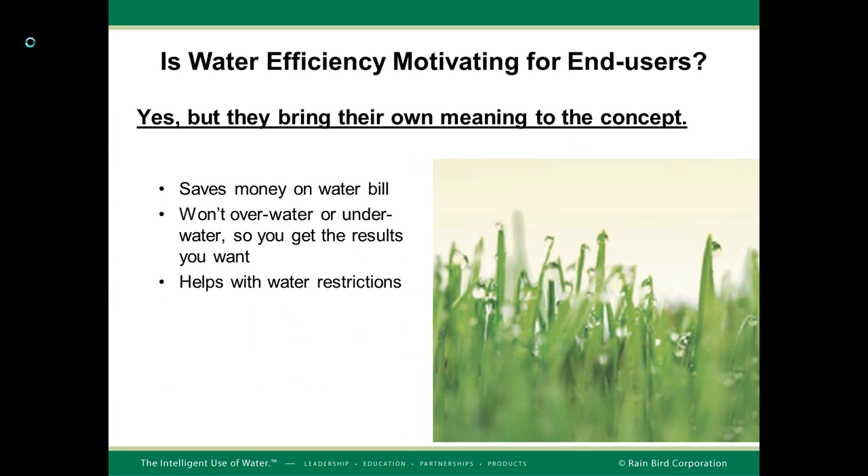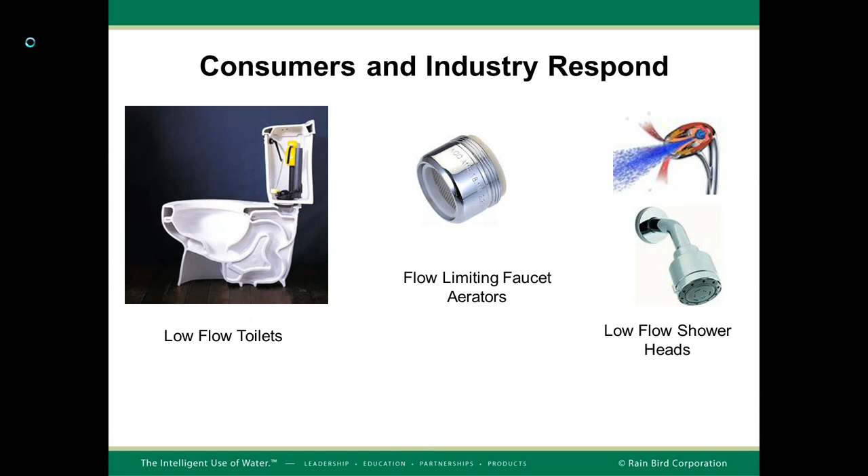We are actually starting to see some water efficient products throughout the various markets, from low flow shower heads and low flow toilets and even low flow faucets. But Rain Bird has always thought that it's our industry, the irrigation industry, that should take the lead in managing this precious resource and promote water conservation through more efficient irrigation management.

Over the course of Rain Bird's history, we have developed numerous types of water-saving products, from water-saving nozzles to sprays and rotors with pressure-regulating stems built in, to even smart control technology. All of these deliver great results, superior results, and they do it actually with providing less water.

So to kind of jump right into the product categories, let's start off talking about a couple of spray nozzles and rotary nozzles.

The first slide you see here is a HEVAN. HEVAN stands for High Efficiency Variable Arc Nozzle, and it's actually the first high efficiency variable arc nozzle on the market.

I know there's a lot of van nozzles, and Rain Bird has a regular van nozzle as well, but they tend to not be overly water efficient. If you look at some features with a HEVAN, like flow control technology, it actually gives you something a lot of spray nozzles do not give you: superior close-in watering around that head. And it's also providing very uniform coverage across the entire spray pattern.

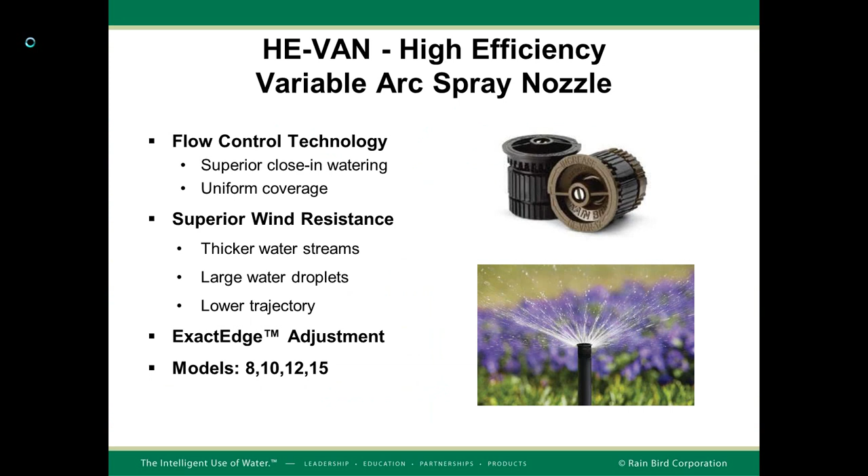If we look at the picture here, on the left-hand side is a picture of a HEVAN. On the right is a competitive van nozzle. Two things really stick out in terms of features with this nozzle. The first is the flow control technology we talked about, where you're seeing superior close-in watering around the head versus a regular van nozzle.

Versus a regular van nozzle where you're getting virtually no coverage near the head. The other is the uniform pattern. You see a very uniform pattern in the left-hand picture all throughout the radius. You really don't see water starting to hit the rest of the pattern until you get way out from the head with the regular van nozzle.

Another thing that's really important when talking about water efficiency and spray nozzles is being resistant to wind. Wind is a huge factor, and it doesn't have to be real windy conditions—2 to 3 mile per hour wind can actually impact a nozzle. So if you look at our water streams, they're very thick.

The water droplets are very big, and the trajectory is fairly low. As you look at this picture, you can see the trajectory pretty much levels out, whereas the van on the right almost continues to rise, and that puts that water pattern in danger of being really impacted by windy conditions.

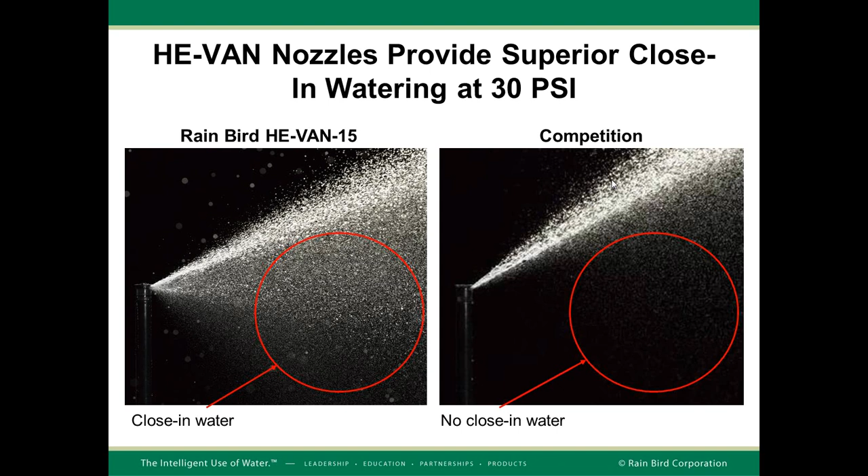When I talk to contractors a lot, I think one of the biggest complaints I hear about a van is arc drift. What I mean by arc drift is that the pattern tends to drift into areas that aren't meant to be watered over time. HEVAN actually has a really unique feature called exact edge technology that kind of eliminates this whole problem.

If you look in the top picture, you can see how you set the arc. You simply grab the collar like most vans, but unlike most vans, when you're twisting to set the arc, you're feeling a click. What this click does is actually lock that arc into place, so it eliminates that overspray.

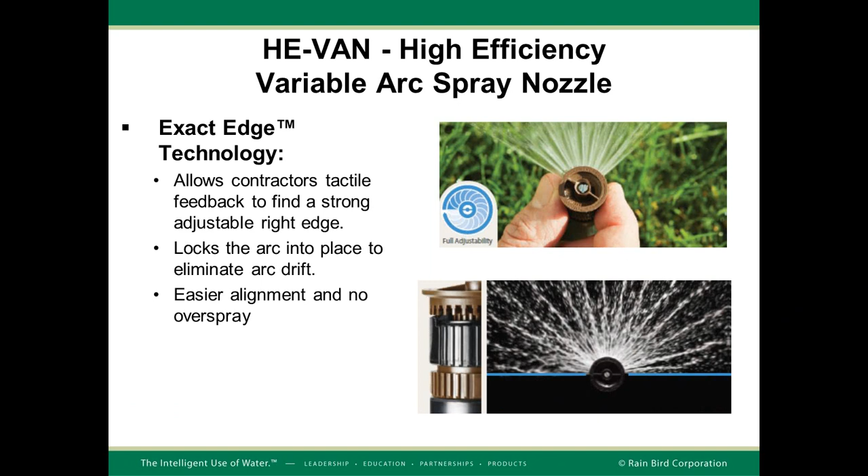If you look in the bottom picture, you see a blue line that goes across the bottom of that picture. Just imagine that dark area being the sidewalk—you're not seeing any overspray into that sidewalk area with a HEVAN. So this would be one example of many we'll talk about today, and others we won't get to, where Rain Bird has taken a very popular item like a van nozzle and made it even easier to use and more efficient.

Another nozzle I want to get into is the RVAN, and it's an adjustable rotary nozzle. What I mean by adjustable rotary nozzle is the spray pattern and the distance itself can all be adjusted by hand, so you need no tools to make these adjustments. It's different from the HEVAN because it offers rotating stream technology, delivering water very uniformly at a low precip rate.

This helps with potential issues of runoff or erosion. But like the HEVAN, it has those large water droplets, thick water streams, and low trajectory. That's why at Rain Bird, when we talk about being able to offer shorter run times with our RVANs than our competition, it's because the water is actually getting to its intended location without wind impacting its effectiveness, potentially having to increase your run times just to make sure you're applying enough water.

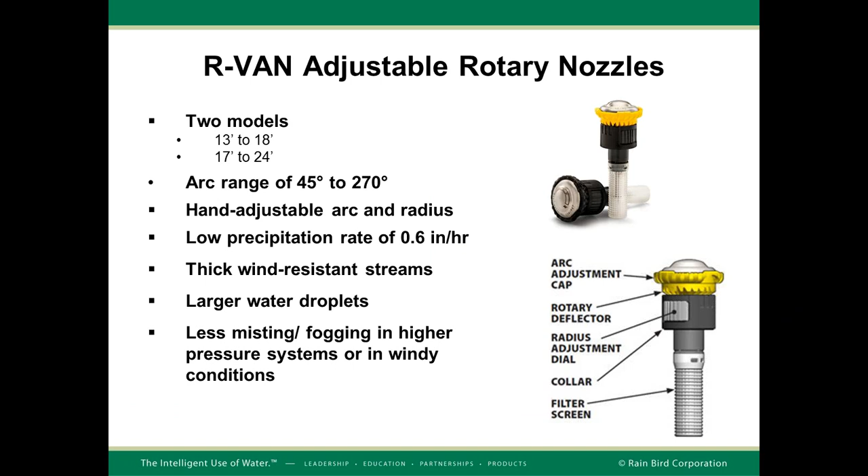If we were to look at an RVan and just retrofit a standard spray nozzle with an RVan, you can really reduce flow by up to 60%. And the overall water efficiency actually goes up by 30% when you replace just a regular spray nozzle.

Now, I kind of glossed over the fact that this is a fully adjustable, hand-adjustable product, and it's actually very important. No tools are required whatsoever to make adjustments. If you look in the top picture under arc pattern, you see a picture of a hand at the top of the RVan. Whenever the RVan pops up under pressure, you simply press down on the top and twist.

You can set the arc from 45 to 270 degrees. If you want to adjust the radius, there's a collar, just like with the HEVan, where you can grab the collar and either increase or decrease the radius.

Now, one feature that's not actually shown in this picture that I think is pretty neat is looking at the top picture again, the way you set the arc. If you need to flush out this head, you can actually pull up instead of twisting. If you pull up, it actually flushes out the head.

And the RVan is available in a 13 to 18 foot throw, as well as a 17 to 24 foot model.

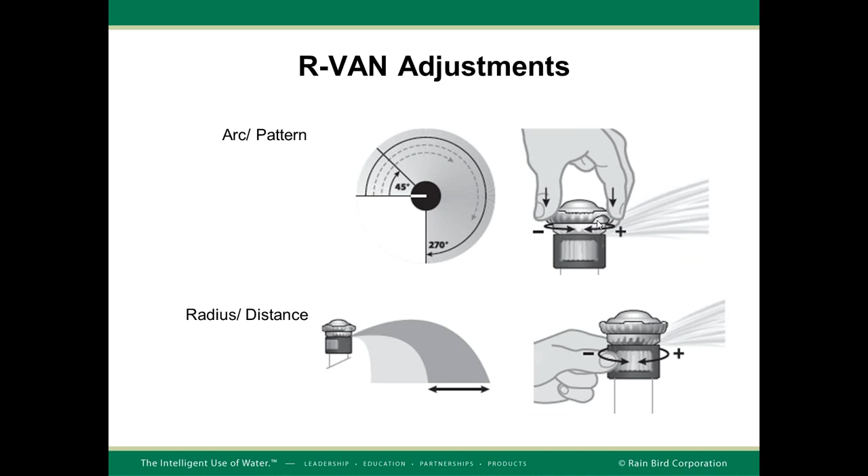Now let's get into some spray body discussions here for a moment. I think everyone has probably heard of Rain Bird's 1800 series spray bodies. For over 30 years, this spray body has been pretty much the standard in the industry, and it's been the standard because of its durability and its reliability, and its performance is pretty much unmatched.

So we started looking at other applications, other potential uses for a spray body, such as dirty water applications. And we wanted to take this spray body to another level, and we developed the RD 1800.

That growing demand on the water supply that we were just discussing a little bit earlier has really increased our overall reliance on looking at alternative water sources. As a result, water used for irrigation today is a lot harsher than it's ever been before. So when we started looking at the RD 1800, we wanted to develop those parts to be resistant to corrosion when using treated water that contains chlorine or potentially harsh chemicals.

And it's got a very innovative design that handles some of the thickest grit and some of the most dramatic pressure variations without any problem. It's got some really cool features like a triple blade wiper seal that prevents stick-ups, and something called flow shield technology that helps identify problems faster.

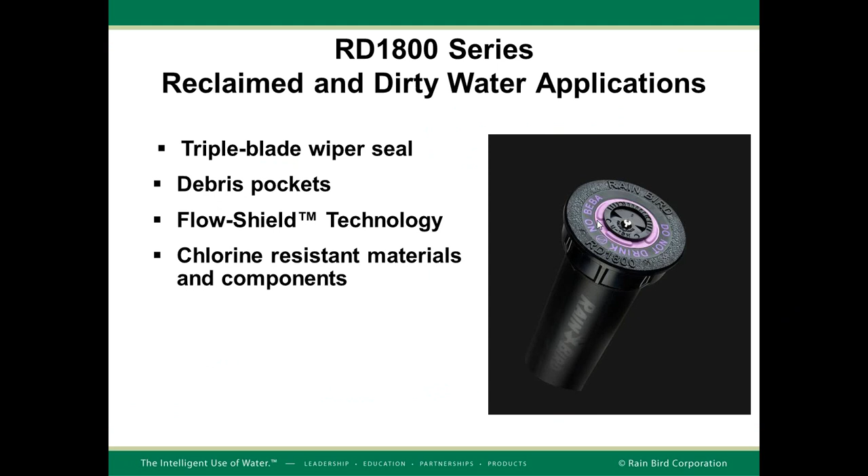So let's hit on a couple of these features real quick. In this picture, you see a wiper seal. If we step back a second, Rain Bird changed the whole irrigation technology when we developed the co-molded wiper seal nearly 3 decades ago for the 1800 series spray body. We really took it to another level with the RD 1800 by adding an additional seal, a third blade. If you look at the picture, you see a picture of the top seal.

Now, the function of that top seal is to flush during pop-up and wipe the stem clean during retraction. Then look at the bottom seal, the primary seal. That primary seal actually combines with the stem surface to eliminate flow-by.

But what if a rock or debris, or something inside of that body, over time eats away at that primary seal? It damages that primary seal. And when we're talking about dirty water applications, there's a high probability of that happening. So if that primary seal gets damaged, what happens? You have excessive flow-by, a lot of water around the stem that basically degrades the entire system.

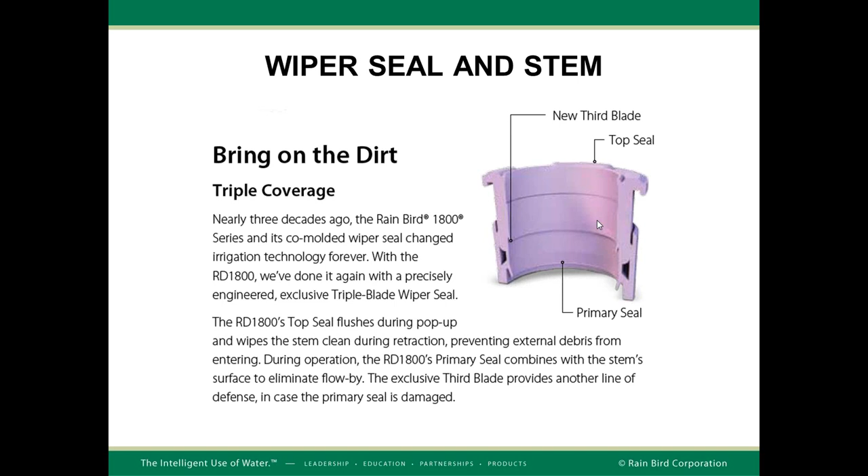So what we did, we added a third blade. It's an exclusive third blade, and this basically provides an added line of defense in case that primary seal gets damaged. So it's almost guaranteeing you that you're not going to have flow-by.

A very unique feature of this spray body is debris pockets. The debris pockets are located at the base of the spray body, and their function is to basically collect debris and prevent this debris from recirculating back out through the body.

Sometimes during system startup, maybe a system was not flushed out properly, or maybe there's just some excess debris in the lines. What these debris pockets do is simply trap this. And like I said, it keeps it from recirculating in the body, and thus it prevents wear and tear on the body itself.

Now let's talk about pressure regulation for a moment, because it's a key factor in using water wisely. Why is regulating pressure so important with the system? For me, there are a few reasons that stand out. Rain Bird, and all manufacturers for that matter, recommend an operating pressure for all their downstream components, so sometimes it's necessary to reduce that supply line pressure to fall within these guidelines.

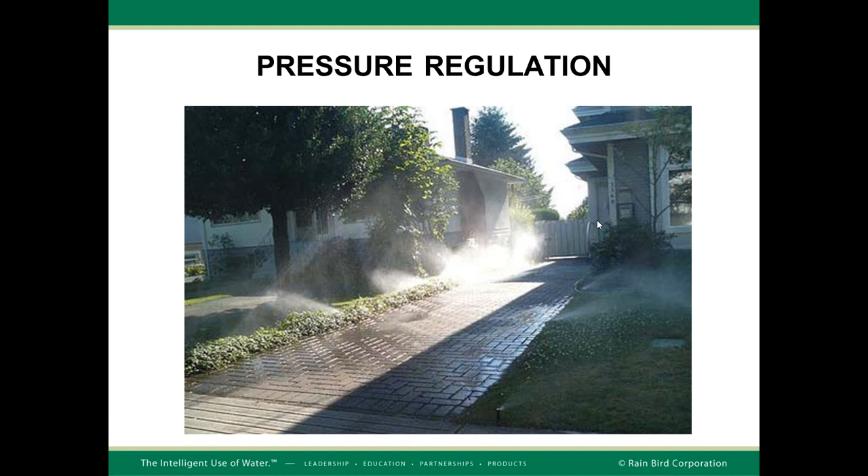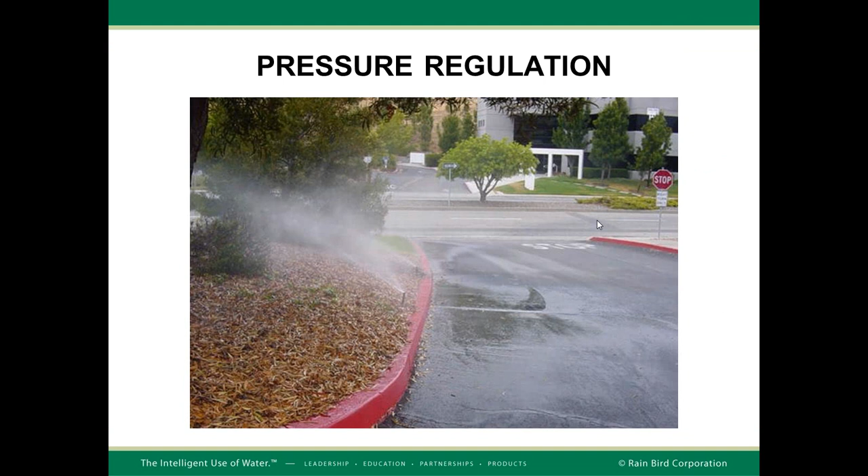Taking a look at the next couple of slides, we see a lot of overspray, a lot of water in areas where it's not intended to go. I realize there are many factors that go into overspray, but high pressure situations are a huge contributor to this. Like the picture we're looking at right now, you're seeing a lot of misting and fogging. The odds of that pattern getting to where it was intended to go are probably pretty slim.

You're either going to have to increase the run times to hopefully put down more water, or you're going to potentially just end up with brown spots and ultimately an unhappy end user. High water pressure is actually pretty common, but Rain Bird has found a fairly simple solution to solve this.

We've found that by regulating high or even fluctuating pressure at the head via pressure regulating stems, we can actually save about 1 gallon per minute for spray and rotor. Pressure regulation is now available in our rotors, specifically in our 5000 series rotor line.

Since water rates tend to continue to climb, customers using PRS rotors can enjoy considerable cost savings. Even just looking at a typical residential site, using either a 5000 series PRS rotor or an 1800 series PRS spray, they can save approximately 100,000 gallons of water per year. To put that into context, that's enough water to fill a swimming pool 5 times over.

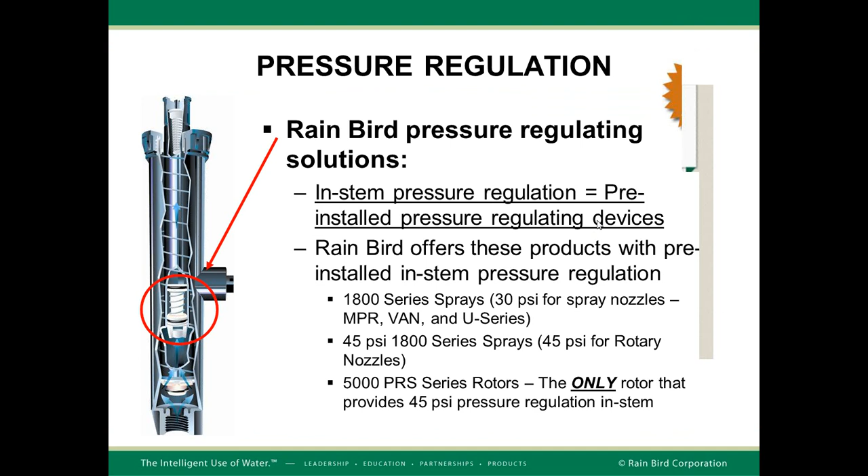Last year, Rain Bird developed a marketing campaign that ran throughout the entire United States, called Project PRS. Project PRS was intended to increase awareness of water savings when using PRS sprays or rotors. We even created a website containing material to educate the viewer on PRS savings. In addition, contractors could go to this site and submit projects where they've done installations during this campaign period using PRS heads, whether sprays or rotors, and we calculated their savings for them.

During the course of this campaign, with just the projects that were submitted, we calculated we saved over 215 million gallons of water during this time frame. So this is just another example of Rain Bird's commitment to the intelligent use of water.

In my opinion, one of the biggest offenders to using water wisely can be a controller. Not always, but it can be. Just basically knowing when to apply water, knowing how to set a run time or start time, or even just knowing that you should be using water-saving devices like rain sensors or soil moisture sensors. So at Rain Bird, we feel if we can keep the controller programming as simple and straightforward as possible, as well as offering a very logical path for progressing through the different types of controllers for various applications, then this will really lead to the ultimate goal of using water more wisely.

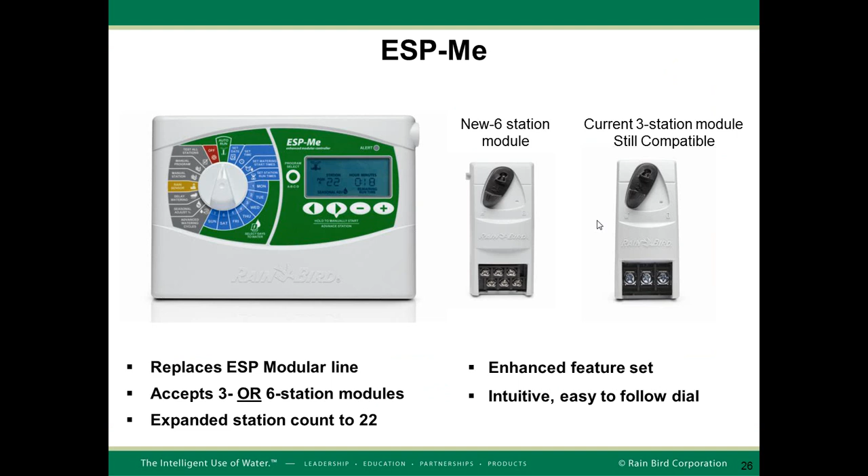Rain Bird.com, which has corresponding videos for each one of the setup features. So if you have an irrigation installer, or maybe it's the end user that just needs to refer back to something, there's always a source they can go to that walks them through the process.

One of the things that we see sometimes is that a lot of controllers are rarely adjusted. A system goes in, and a lot of times it's set for that peak irrigation. Unless it's under some sort of maintenance contract, it's rare that the controller gets adjusted. And if it's not getting adjusted and it stays at that peak setting all year long, it's applying way too much water, 2 to 3 times too much.

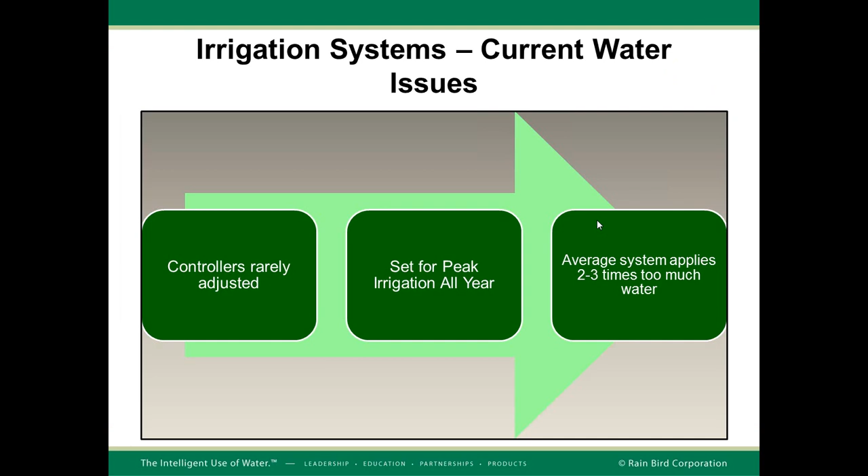So Rain Bird decided to develop a very easy-to-use smart controller. It kind of eliminates some of the problems with not adjusting the controller, or some of the past, poor scheduling issues that we sometimes see.

I think everybody knows Rain Bird has vast experience developing really large-scale central control systems for golf courses, or for commercial applications, utilizing products like Maxicom or Site Control. But we've taken all these years of experience, all this knowledge, and we've scaled it down. We've shrunk it down to a very easy to use smart controller that can be used for a variety of applications.

Now it's basically playing off the ESP-ME. It's an upgrade to the ESP-ME. And like the ME, it expands to 22 stations, where before we were limited to 13, and it's putting us in a much better position, not only on the residential level, but to service a lot of different commercial applications now with a smart controller.

And it doesn't program like a typical controller. It actually takes in a few factors before it decides whether it's going to water or not. One is it has a weather station, and it measures both the temperature and the rainfall at the site. And it's not just measuring rain, but it's also measuring the intensity of the rainfall via a tipping rain bucket.

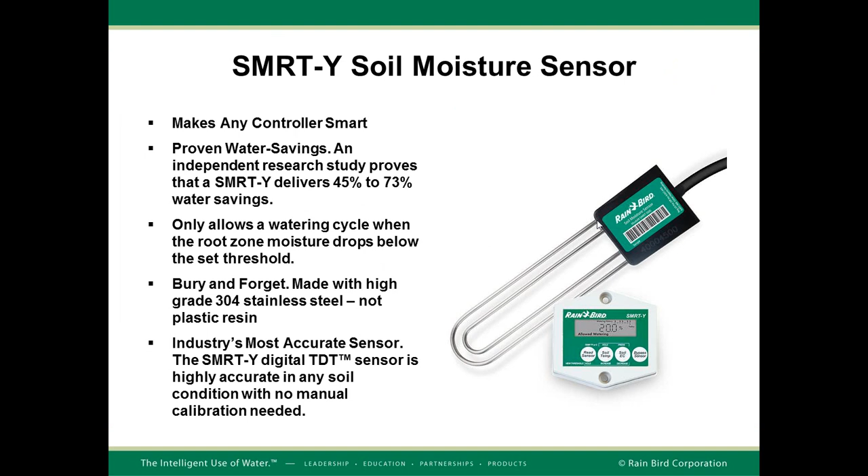And it provides the last 7 irrigation cycles on the display. So a device like the soil moisture sensor really helps eliminate a lot of the needless watering we see, letting the soil basically say when watering is appropriate. It really optimizes the amount of moisture at the root zone. From an ROI perspective, just looking at cost, it conserves enough water in many applications to pay for itself in less than a year.

When you talk about water-efficient products, one of the most efficient irrigation methods is drip irrigation. Drip delivers low volumes of water directly to the plant root, without dealing with a lot of the factors we've talked about before. You don't see water loss to wind, and you don't see a lot of runoff from overwatering, evaporation, or overspray.

Rain Bird is completely committed to this product category. We offer over 150 different irrigation products, the broadest in the industry. But for today's presentation, I'm just going to touch on two products: XFS and XFCV.

XFS is a subsurface drip line. You can actually bury this drip line. It has a copper chip at each emitter, and this copper chip helps prevent root intrusion without requiring the EPA-approved handling procedures that some competitors require because they use a chemical in the line or a treated filter to help prevent root intrusion. That's not needed with the copper shield technology.

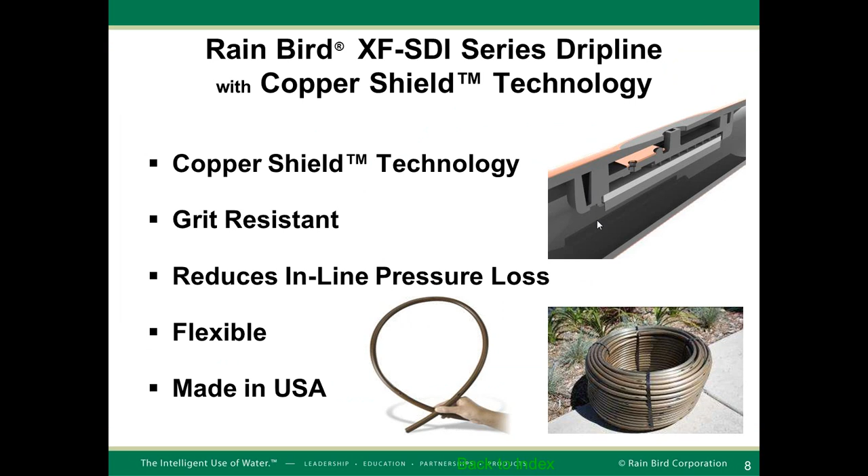With this drip line, you get dual-layered tubing—basically copper over black—which gives you strong resistance to chemical and algae damage, and of course UV damage. Even the emitter design is unique, with an extra wide flow path combined with a self-flushing action. It's also a very low profile design, which helps reduce inline pressure loss and allows for longer lateral runs, simplifying the design process and reducing installation time. The tubing material is the most flexible in the industry, making this subsurface product very easy to design and install.

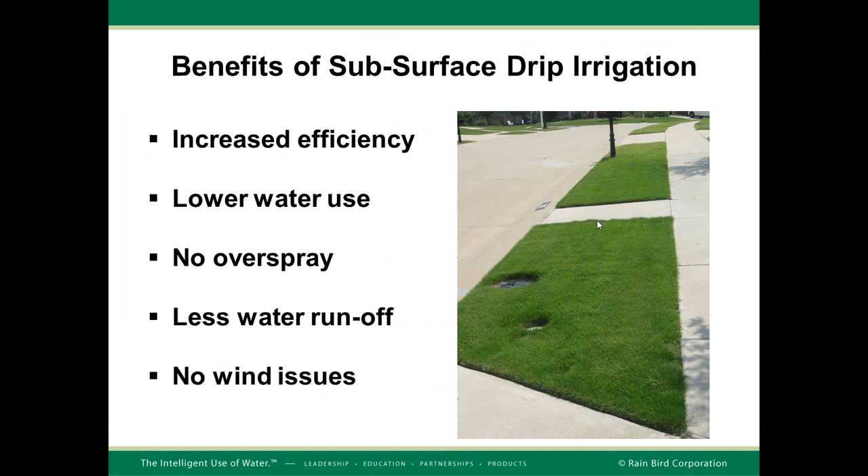Now the other type of drip line I want to hit on quickly is XFCV. XFCV is a drip line with a very heavy-duty check valve. It's a 3.5 PSI check valve that keeps that drip line charged all the time, and it even keeps it charged in elevations up to 8 feet.

What's great about XFCV is that it's part of the overall Rain Bird XF family, which simply means it's the most flexible tubing in the industry. It's actually 20% more flexible than a leading competitor.

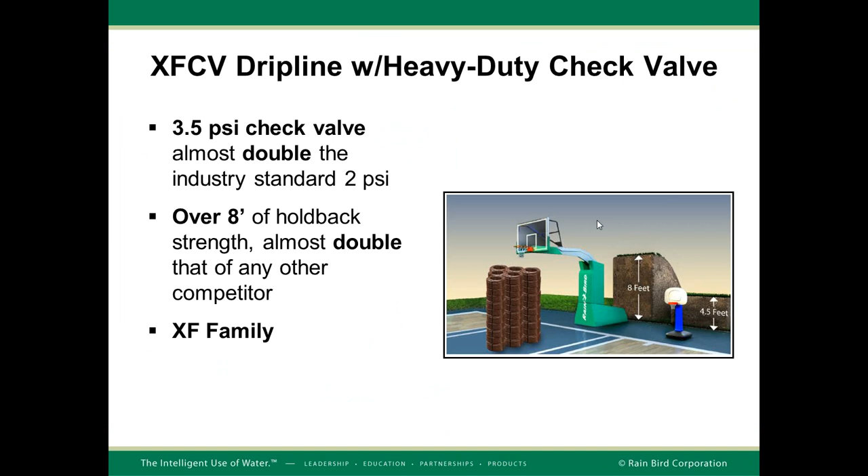I don't think I mentioned this earlier with XFS, but it also offers a self-dispensing coil, which means it's very easy to use this drip line. You can now have one person on the site installing the drip zone because it's much easier to handle, lay, and install. It's also UV resistant. It comes in 0.6 or 0.9 gallons per hour flow rate, as well as 12 to 18 inch spacing.

I'm going to touch on two of these products in that category. The first one is the ESP RZX controller. As we discussed earlier, a controller can either have a positive or negative impact on the performance of the system. The RZX is a contractor-grade controller that maintains a very high level of quality and efficiency as all the other controllers in the Rain Bird ESP family, but it's geared towards simplicity for the end user at a lower cost. The way the programming is designed is pretty unique.

It offers zone-based scheduling, which is easier for someone to understand that's not installing irrigation every day. It's much easier for the end user to understand. This zone-based scheduling allows every valve to be scheduled independently, so there's no more explaining programs, which can sometimes be confusing to the end user.

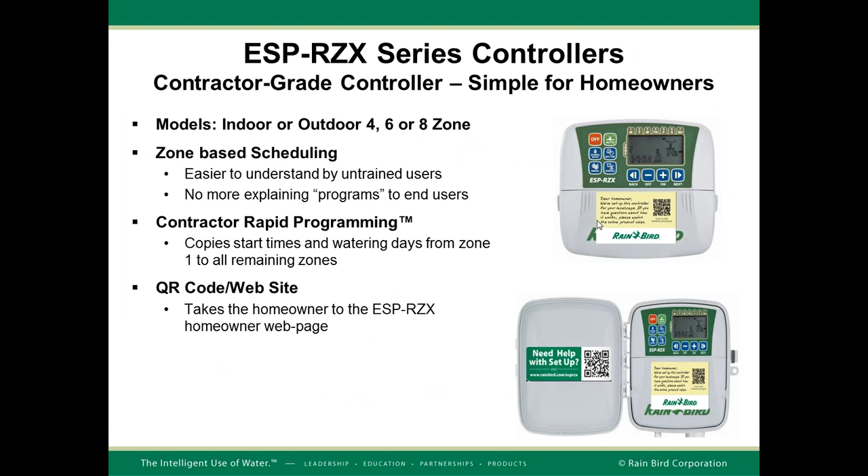The other value-driven product I wanted to talk about is the HV valve. Rain Bird has taken a very traditional product like a valve and we've innovated the way it's designed, improving its strength while reducing its cost. We've actually reduced the cost to 20% lower than our competitors' list price. It's made out of a glass-filled polypropylene, which is a lighter, stronger material than some of the valves made with a PVC type material.

And even though it's very lightweight, it's extremely durable. Matter of fact, it has some of the similar flow rates and pressure parameters as some of our higher priced valves. Another great feature about this is that it really installs and services quickly because it only has 4 screws, and they're multi-drive screws, so you've got a flat, Phillips, or hex option.

And the screws are also captive, so they're not going to come out. That eliminates the problem of lost or misplaced screws. Even the diaphragm has been redesigned, and it's very unique. It's a slightly off-center diaphragm seat, which allows the diaphragm to close more smoothly, helping to lessen the effect of water hammer.

And because of our confidence in this valve, we put a 3-year warranty on it. And just like all the other Rain Bird products, they all must go through vigorous testing, and the HV went through the same testing. We've shown that the HV handles 100% more repeated pressure spikes of 200 PSI than our closest competitor, and with life cycle tests, it shows the HV exceeding 10 years of operation without failure.

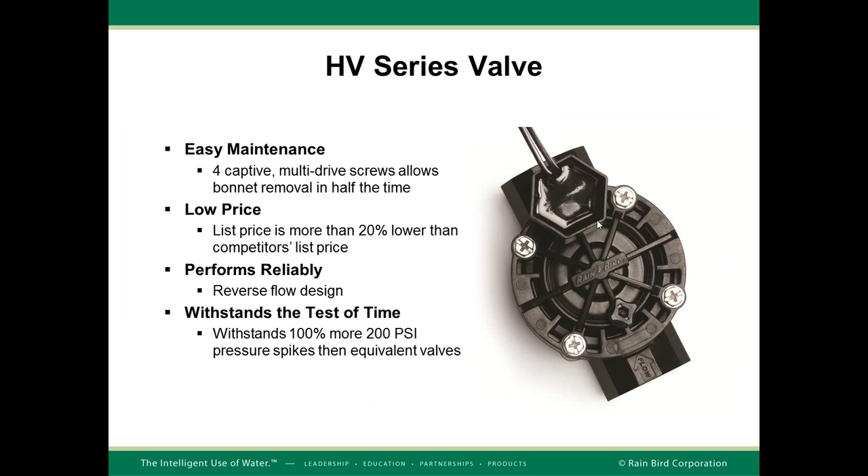I want to touch on a new product category that we have recently gone into. For quite a number of decades now, Rain Bird has been finding new ways to use water more intelligently. So when we were considering a new product category, we looked at our core business first and simply asked ourselves, what do we do best? And I think the answer was pretty simple: we move water very efficiently.

So for us, the logical next step was drainage. Drainage really complements our core products. It allows Rain Bird to offer a complete water management solution now. And that shortage of fresh water supply we've been talking about has really made things like water harvesting solutions very important, and it's taken Rain Bird a step further in being able to develop ways to capture water and reuse it through irrigation.

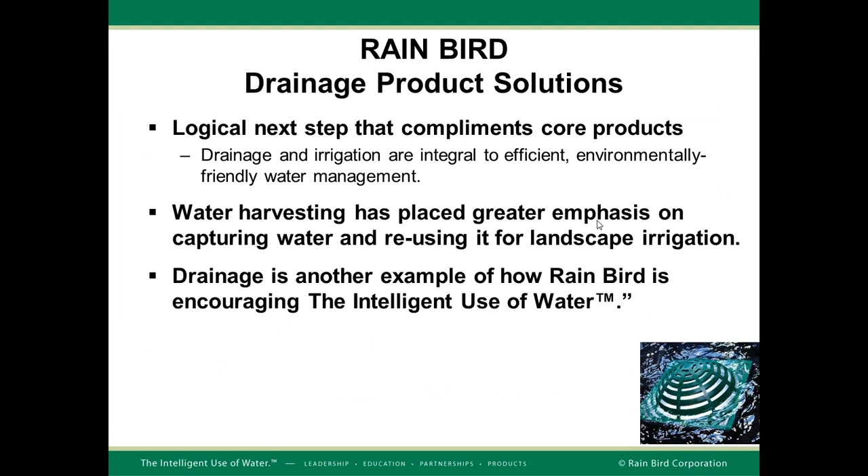We have grates and basins and various drainage accessories, and they're all built with that same high quality standard and materials as all Rain Bird products. Matter of fact, we even back it up with a 3-year warranty, which is the best in the industry. It's available in 4 different colors, and it's even compatible with some of the most leading manufacturers if you're looking for a quick upgrade or a quick replacement. And a big benefit to contractors purchasing Rain Bird drainage is that they get Rain Bird points as well.

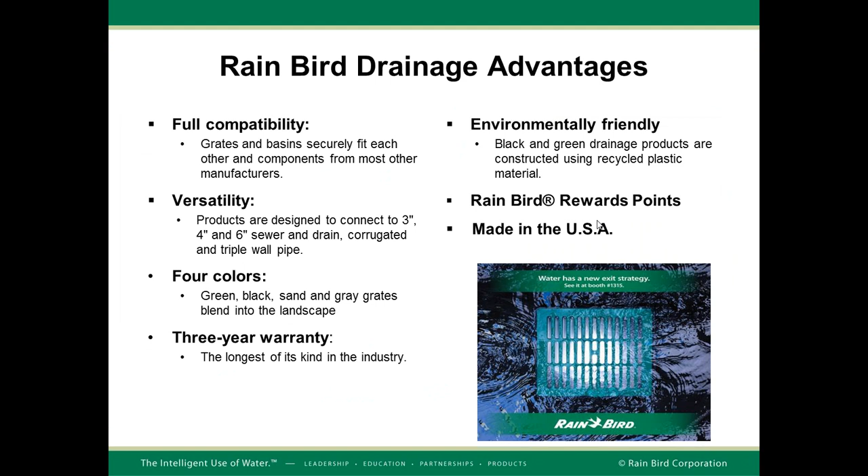And Chad, this kind of ends my formal portion of my presentation. If anyone has questions, myself and Greg Palumbo would be happy to answer them.